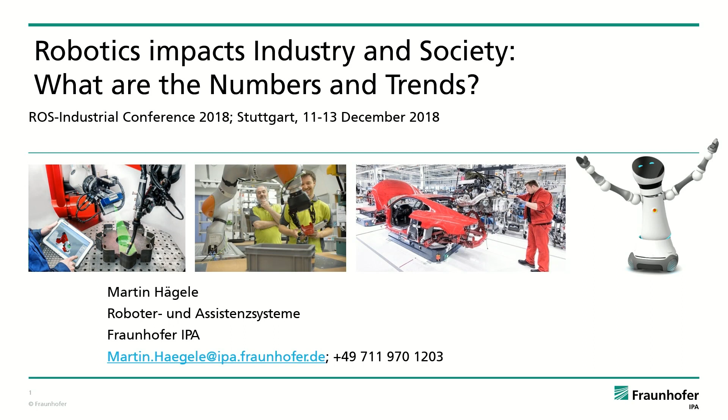Before I come to the figures, I'd like to give a short introduction to what we are doing at Fraunhofer IPA, who we are, and what we are working on. My presentation: Robotics Impacts Industry and Society - what are the numbers and what are the trends?

The Fraunhofer Society - many of you have probably heard of it or had interactions with us. We are the largest organization of applied research in Europe. Applied research means that whatever resources, competencies, and infrastructure we maintain serves a purpose - to satisfy industrial R&D needs.

We are distributed all over Germany, in total 72 institutes, and each institute stands for a typical portfolio of activities. In our case, it's manufacturing, engineering, and automation, so we clearly address the production area and the suppliers of manufacturing equipment.

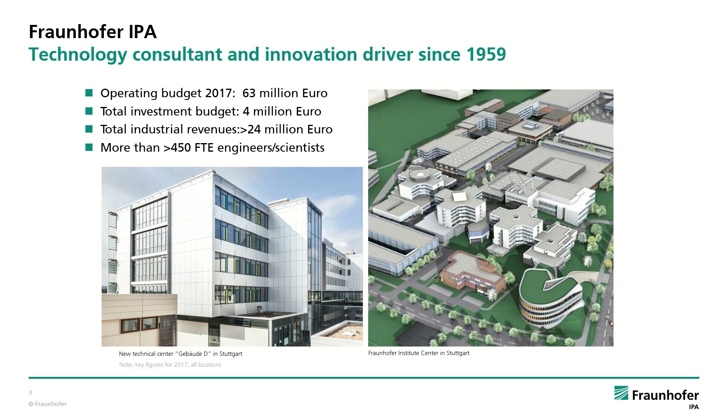We will see the facilities tomorrow when we visit our institute. Here you see the buildings, and as you might anticipate, we maintain large infrastructure regarding labs and testing facilities - this is the signature of applied research.

In total we have about 450 engineers, and a good deal of our annual turnover comes from direct industrial contract research. Here you see some of the labs we maintain in Stuttgart - I've marked the ones we'll be visiting tomorrow with a red frame.

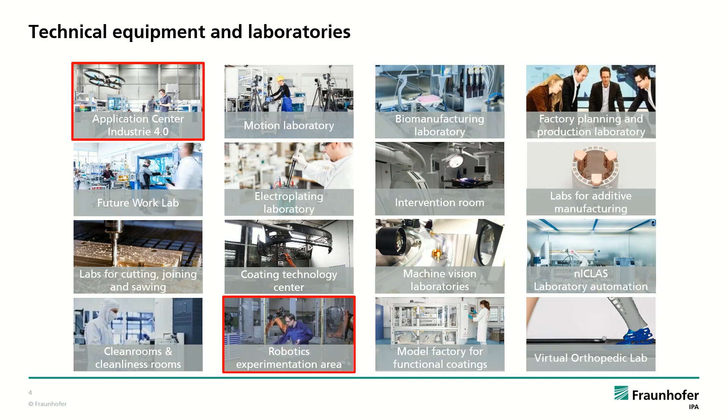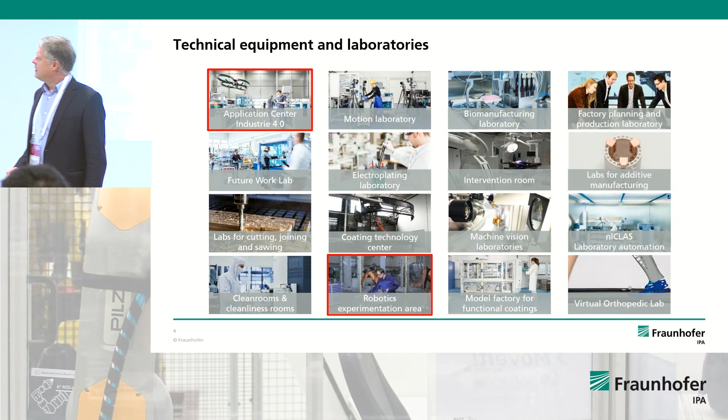We'll look into the robotics experimentation area and also the Industry 4.0 application center. As you can imagine, robotics, Industry 4.0, machine learning, and data science are currently very much in the focus of our activities. That's the last slide of our profile.

We also maintain a complete research factory called ARENA 2036. ARENA stands for Active Research Environment for the Next Generation of Automobiles, and 2036 marks the 150th anniversary of the invention of the car here in Stuttgart.

The ARENA is a focal point of the local industry, which is very much influenced by automotive industries, their suppliers, and suppliers of automation equipment and machine tools. This has a tremendous impact on our portfolio as Fraunhofer IPA, and many actors in these industries come together to form an ecosystem, a common platform called ARENA 2036.

One of the activities is the manufacturing challenges of the car of the future. We have here Thomas Dietz, one of my colleagues, who is the manager of the experimental production facility. Maybe you've seen a bit of the video - it represents the idea of future car manufacturing.

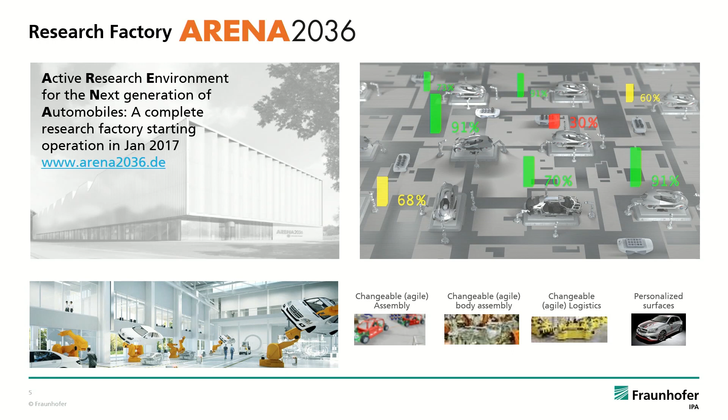So you no longer see conveyor belts - you rather see work cells connected by automated guided vehicles. These work cells are composed of robots or manual workplaces, with no fences. Quite a number of the typical trends we're currently seeing happening everywhere are focused here in this research factory.

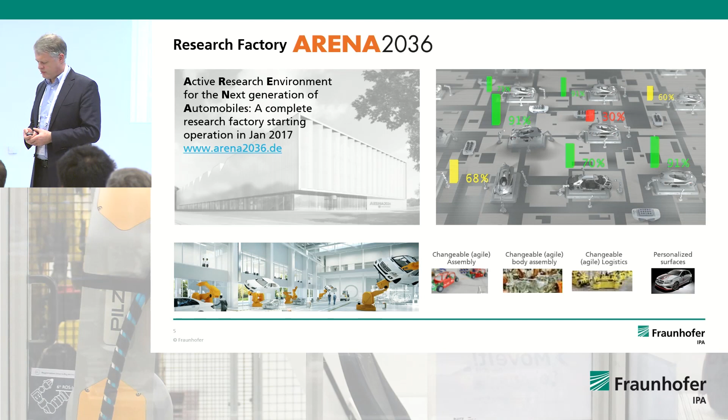Now jumping into the numbers - one of my part-time activities is to serve at the International Federation of Robotics, the IFR, which is the platform of international robot manufacturers. One of the main purposes of the IFR is to provide statistical material and trends on where robotics is going.

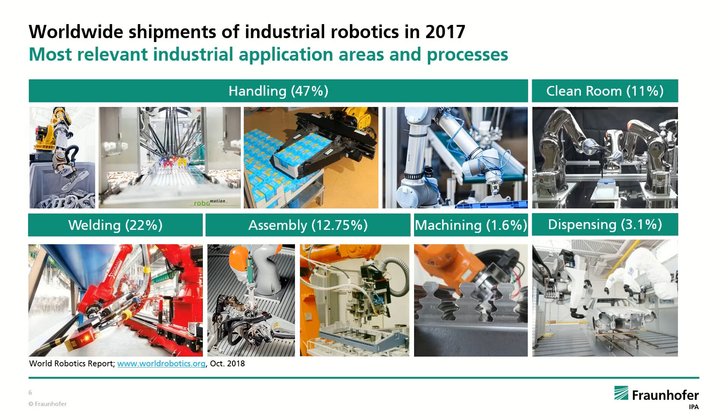So when we talk about installation numbers or recent shipments, we see extreme strong growth worldwide, and there's a reason to this. In 2017, close to 400,000 robots were installed worldwide, and there's a very strong gradient upwards. You see the reason is especially due to the high demand in China, shipments are very much increasing.

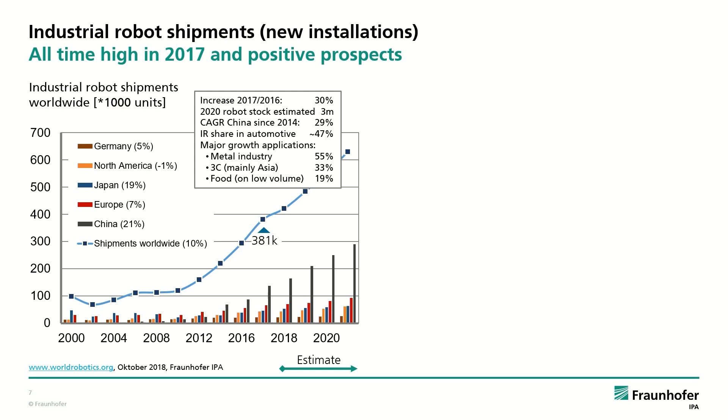So here you see the indications in percentage. In 2020 we expect close to 3 million robots, and still about half of all robot installations go into the automotive field. However, this used to be 54% some years ago, so you see there's actually a decline in the installation numbers of robots in the automotive area. What more and more comes into play is the 3C domain, which is communication, computers, and consumer. This is related to all the applications - handling, assembly, gluing, dispensing material for precision goods, from mobile phones to tablets and so forth.

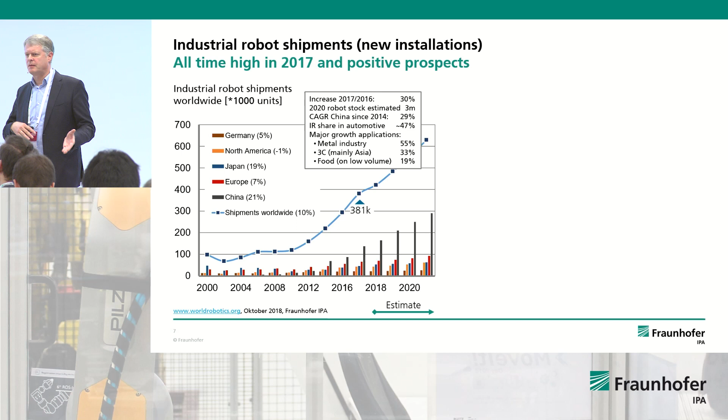Of course, it's now not very fair to compare, for instance, shipment numbers in China to Belgium, to take your example, because obviously the economies are quite different in size. So there's a different measure we use, and that's the so-called robot density. The robot density expresses how many robots are installed in a given area, divided by 10,000 workers in that area. It's a typical normalization of that figure.

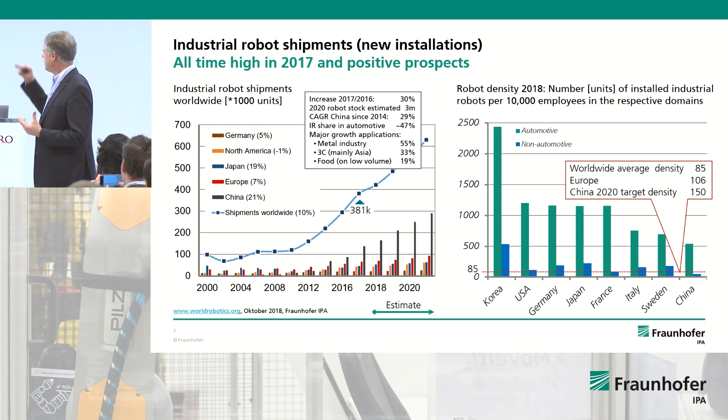There we see that, of course, since there's huge growth in China, China is still represented under average. Furthermore, you see in this picture, regardless of where you produce automobiles today worldwide, it's very highly automated, and probably all on the same automation level, maybe with the exception of Korea, which indicates a little bit higher numbers. This robot density in the automotive field is about a factor of 5 to 6 higher than in all other industries.

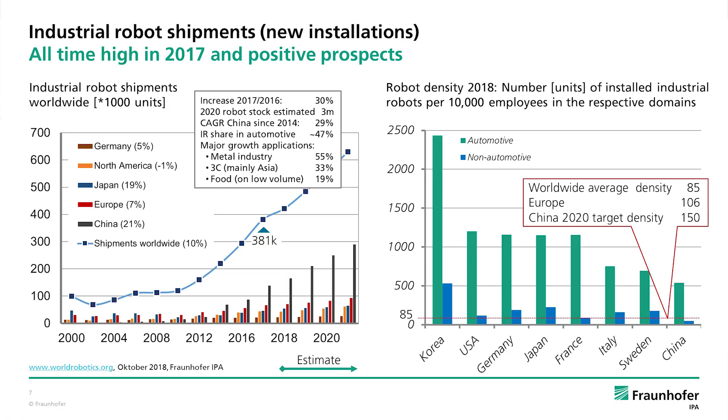What are the technological trends? There's one interesting trend, and this trend is cost effectiveness. With the increasing numbers, we experience also economies of scale. This means that robot unit prices are decreasing.

If you take the average price of all robots, regardless of their size, large or small, you end up at an average unit price of about 40,000 US dollars. At the same time, you see that price level has been decreasing over the years, while there's also an increase in salary or wages. From that chart, you could deduce that never before has automation been as cost effective as today. However, we all know that the robot unit price is almost only a part of the entire cost of installation. As a rule of thumb, it's about a factor of 1/4 or 1/5 - usually the system is about 4 to 5 times more expensive than the robot itself.

We have seen more trends, for instance, human-robot collaboration. We don't have official numbers on that area yet, mainly due to the big confusion we are experiencing in this field. If we really talk about human-robot collaboration, meaning robot and human working at the same time on the same workpiece in possible direct contact, there are only a couple thousand, maybe even just a little more than 1,000 installations worldwide. Most of these installations are pilots or prototypes, etc.

However, if we look at robots which are also named or called collaborative robot installations without fences, where you have some kind of coexistence, then the number is quite higher - significantly higher than the 1,000 or couple thousand I just indicated.

Sensors: about 15 to 20%, depending on the application area, of all robots are equipped with sensors. That's not very much. However, all robot manufacturers actually try to increase the sensor level of their robots, up to the idea that all robots will be equipped with sensors.

For instance, when we talk about force torque sensors, this means joint level control or torque control or force torque control, we see more and more robots which have sensors of these kinds integrated in the equipment. The same holds, of course, for vision-based sensors, so that we expect that in the very near future, 100% of all robots might come with sensors.

And once we have sensors on board, we also use them to detect objects, to identify objects, to model work environments, and also to actually recognize the worker. So obviously there's a tremendous potential in endowing robots with intelligence, with cognitive skills.

Another aspect which goes hand in hand with human-robot collaboration is intuitive use. Nobody wants to have an expert programmer working with a robot. So the requirement is to enable the worker to work with a robot as intuitively as the worker would work with any other tool or machinery.

So obviously, intuitive human-robot instruction is on the roadmap of the robot manufacturers. In fact, there are quite a couple of companies producing or offering already interfaces which enable graphical programming, programming by voice, or other capabilities.

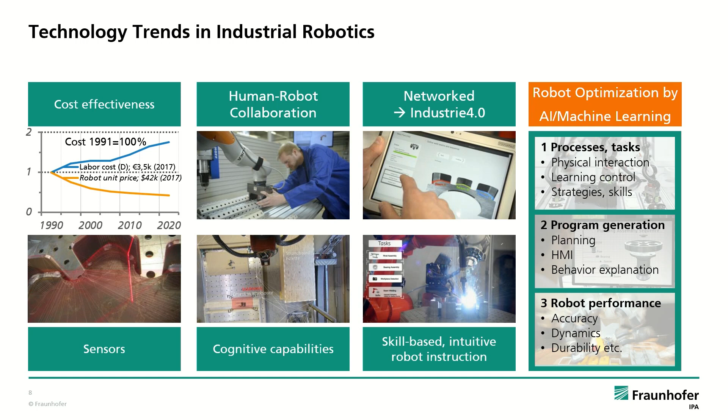One aspect which is increasingly coming onto the map of current research is machine learning, using AI in robotics. We already can localize three main areas where AI and machine learning are used in robotics. The first is related to the actual processes: to detect objects, to optimize processes, to improve strategies.

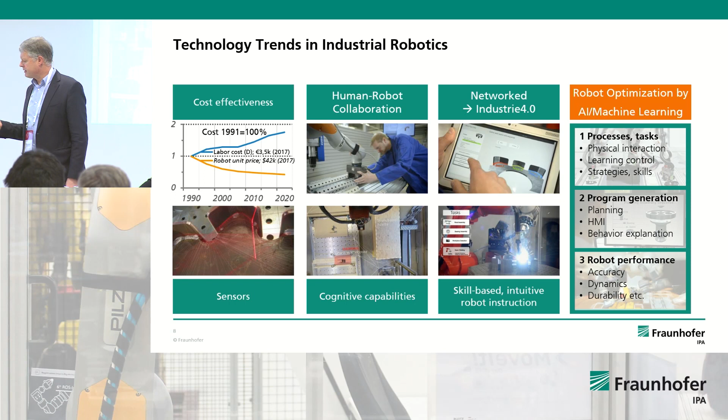The second is, of course, program generation: how is a program actually generated out of digital data? And the third case is to improve robot performance. This is quite interesting, especially for less expensive robots, maybe equipped with lower grade mechanics or mechatronics, so that we can improve dynamics, accuracy, and durability of the robot through machine learning. These are the trends most research labs worldwide have on their research agendas.

Another big trend is that we see a lot of robot functionalities outside the manufacturing scenario, and robots used outside the manufacturing area are called service robots. Service robots come in two categories: the first is robots for professional use, which is equipment that is part of a service or part of professional task execution. The other branch is service robots for personal or domestic use.

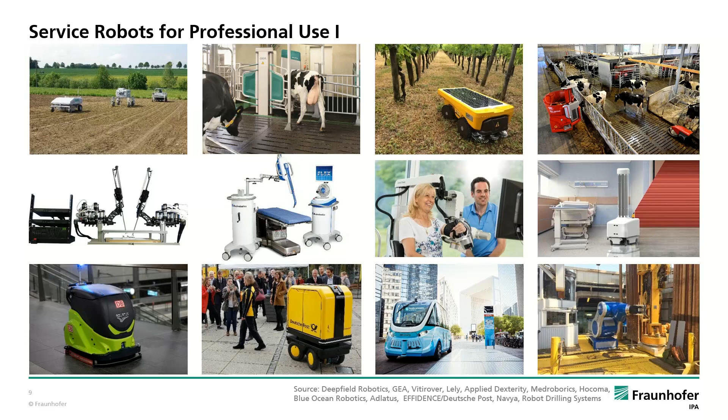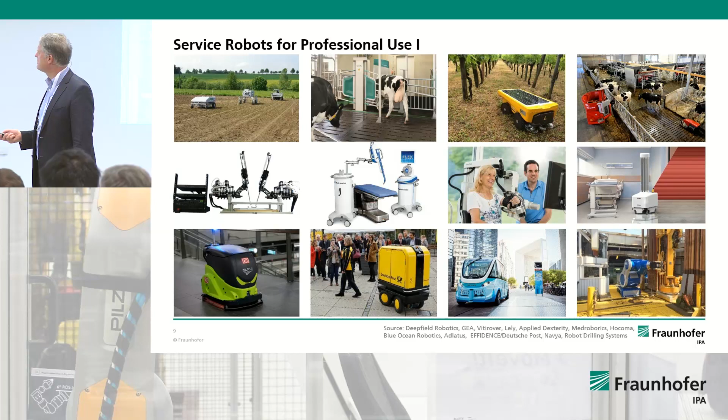So I have here some examples of service robots for professional use, for instance in agriculture, in the medical field, in cleaning, in transportation, and inspection maintenance, rehabilitation, transportation, defense, underwater, retail, entertainment. So there are a tremendous number of different application areas of service robots.

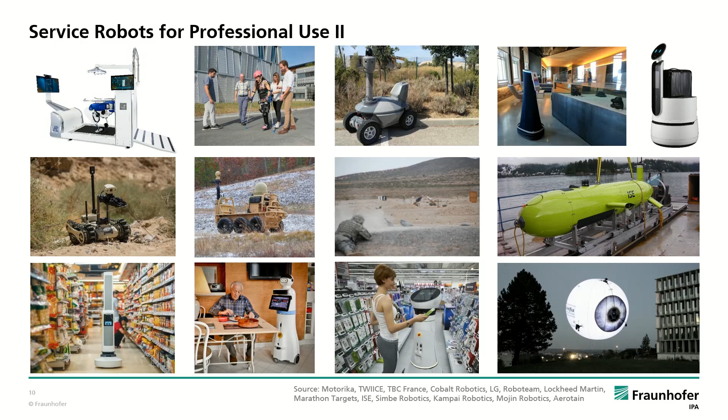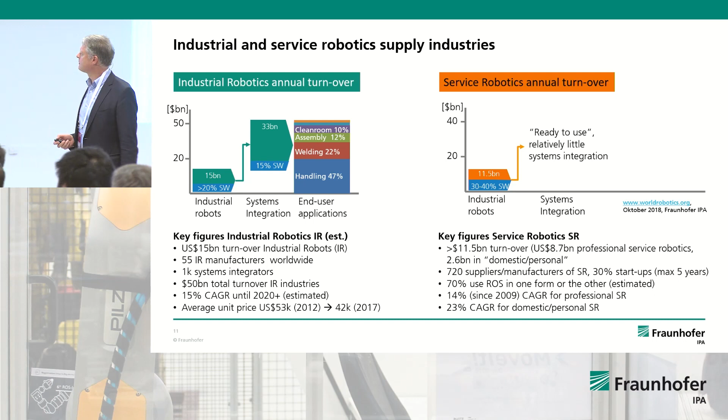The IFR names a worldwide market of industrial robot applications of about 50 to 55 billion US dollars—that's the world market. We have relatively few industrial robot manufacturers, about 55, maybe 60, but certainly below 100. So it's a relatively small number of industrial robot manufacturers. We have way more system integrators. I already talked about the annual growth rate and the average unit price.

So the picture in service robotics is quite different. First of all, the market is still a little bit smaller. In total, we have about below 20 billion euro turnover at the moment.

However, it's very strongly growing. You see the annual growth rates of 14 and 23% for professional and domestic personal service robots.

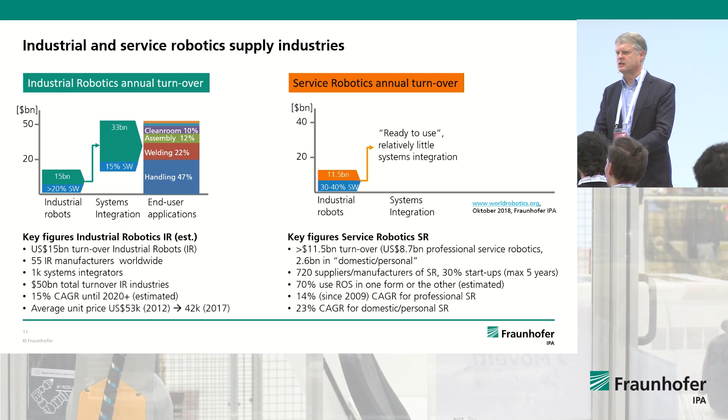We have 720 suppliers of service robots. So it's a completely different, a way more fragmented market of quite many very small companies. However, there are also larger companies underway. We'll see that difference in a minute.

And also striking is that we estimate that more than 70% of these companies use ROS in one form or the other.

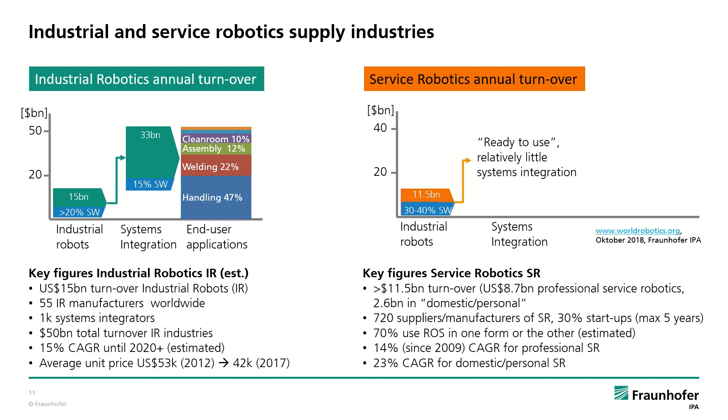Maybe a couple of remarks on the service robotics market, because it seems to be fragmented and a little bit more complicated. How is statistics actually generated for that market?

The IFR reaches out to more than 700 service robot manufacturers, asks for numbers. How many robots were shipped last year? This means in 2017, how many, or what value was shipped, what is the forecast for the next 4 years, both in units and in value. And then we also ask for other data, like what is the company size, age, status, and where that company is located.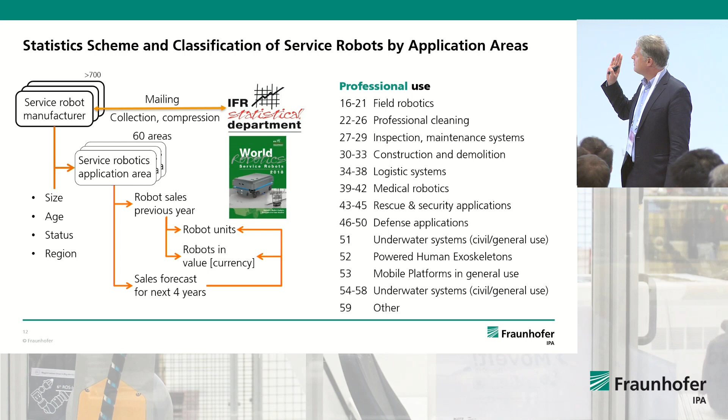You can retrieve quite a big deal of these figures from databases, and we see that there are quite many different application areas, and in total there are about 60, starting with field robotics, and within that category there's also different types of robots, for instance milking robots, or for the barn, or for broadacre, for harvesting, and so forth, so that there are quite many types of robots, professional cleaning, and so forth.

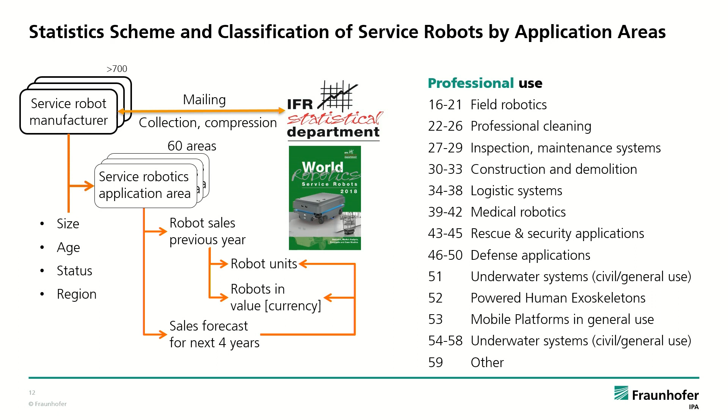You have seen some of the examples, and on the next slide we see the main application areas and the growth rates, and we see pronounced growth in logistics, in the medical domain, in field robotics, which means agriculture, and of course defense. And don't be mistaken for the blue bar.

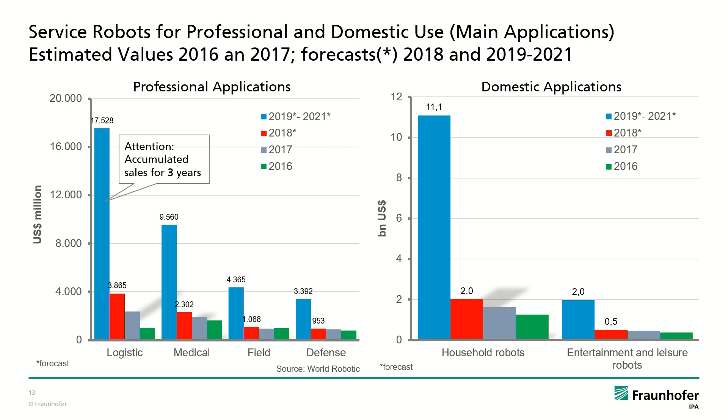The blue bar actually comprises numbers in terms of sales for the next 3 years. Maybe one remark is that these are all conservative estimates, because only those numbers which are reported make it into the statistics. So, for instance, we have very good feedback from companies producing agricultural robots, and we have a way worse feedback from companies in the defense area, for obvious reasons. Since we only use data which are reported or existing, the actual numbers might be still higher.

For the household and private domestic domain, numbers are also quite interesting. We have two main categories. These are household robots, mostly vacuum cleaners, window washers, and lawn mowers. And the second category is entertainment and leisure robots, robots which cost a couple of hundred euros. So that's the situation at the moment.

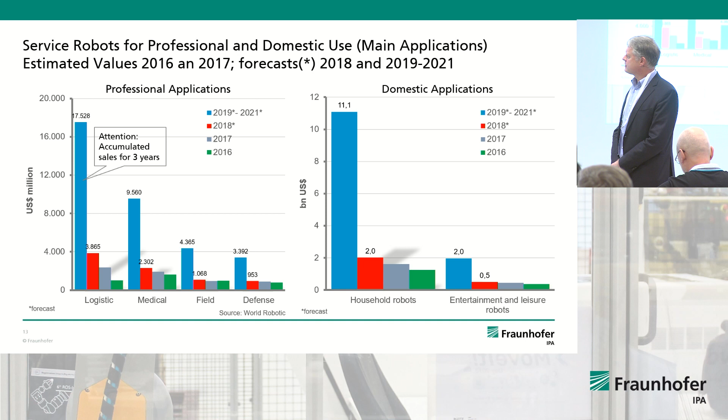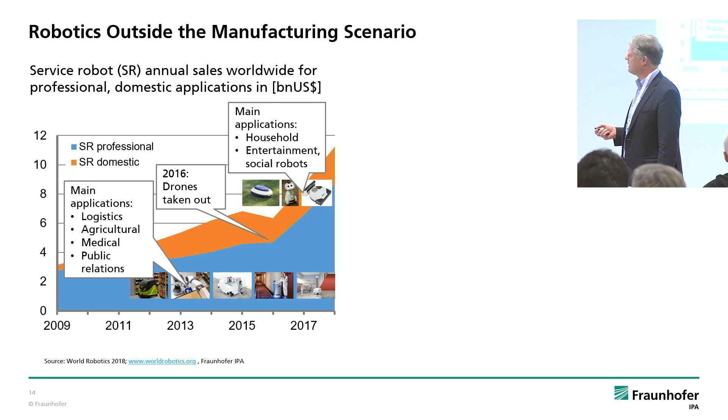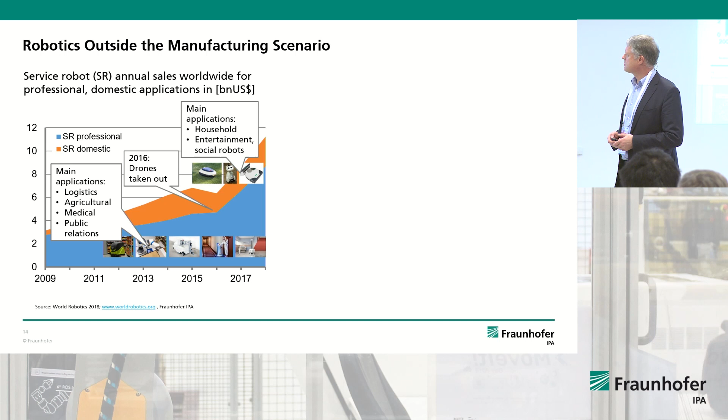When we sum it up, we talk about a market of slightly more than $11 billion with the growth numbers which were indicated. One remark is also, in the past we counted drones as robots, but in 2016 we gave up on counting drones because there are quite too many, and the industry was also very fragmented, very difficult to reach, and obviously there's now our own statistics on robot drones.

Interesting is, when we talk about 720 companies worldwide offering service robots of any kind, where are these companies located? What is the age of these companies? And here we see, for instance, that still most of the service robot companies are located in Europe.

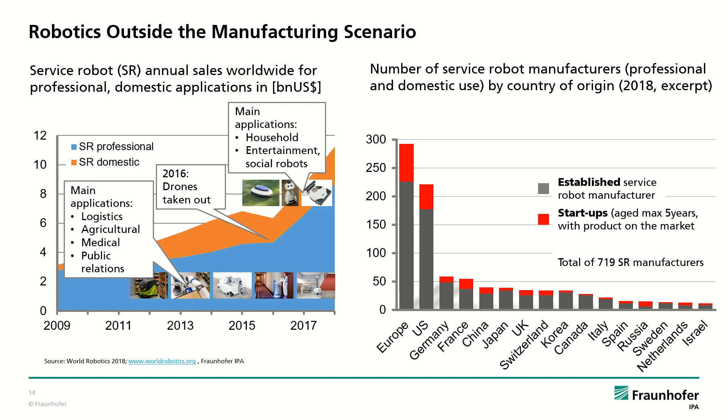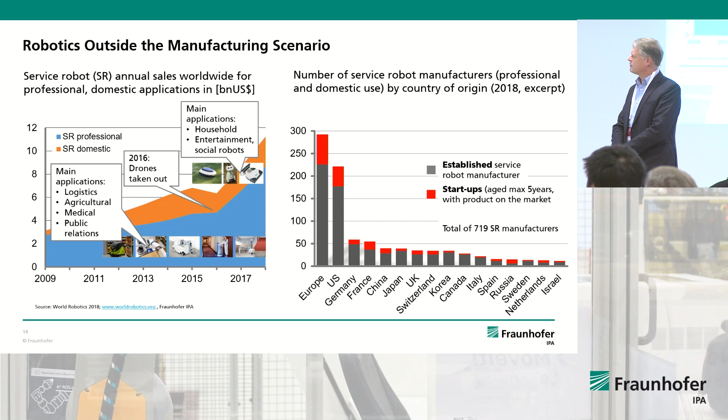You see about 30% of these are startups. We count startups as companies which have a product on the market and are less than 6 years old, so 5 years maximum - that's a startup in our case. Followed by the US, and you see quite many European countries. Again, the Europe bar is the sum of the European single bars added, so that's the situation as we see it at the moment.

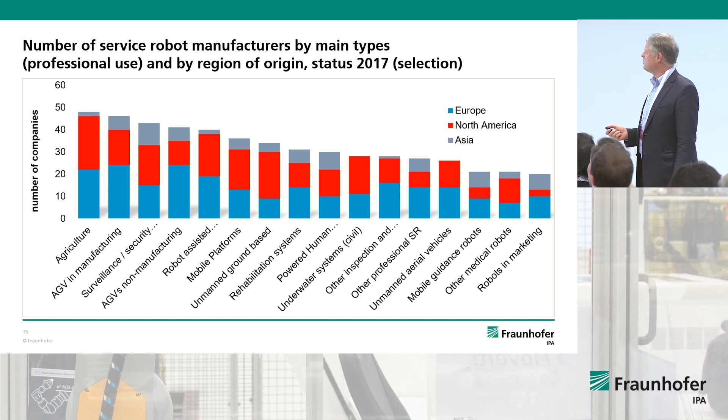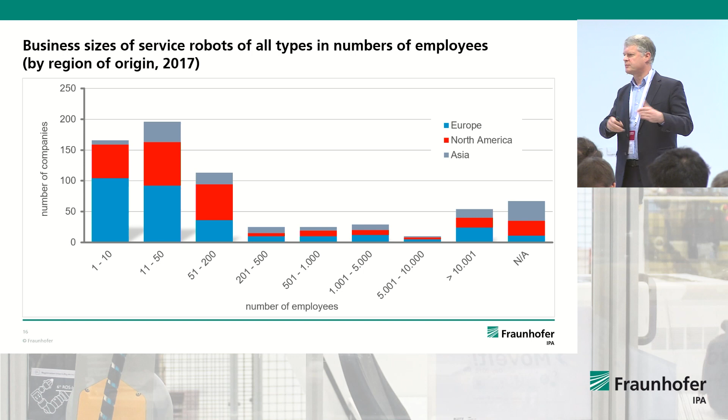And last, on the other scale, we have very large companies like Siemens, like LG, like other multinational corporations which have robotics research, which have robotics products already in their portfolio.

So that's it for now as a short overview on technology, on statistics, on markets, and I'm of course very happy to answer your questions. Thank you.

We are at a ROS conference. Can you give some outlook on usage of ROS in industrial robots?

Uses of ROS in industrial robotics? Is somebody looking at it? How often is it used? Is it for production or for research only? And what's the estimate of it?

So we do not have figures. Maybe there are estimates among people deeply involved in the ROS Foundation, or ask maybe Mirko from the memberships. We do not have that for industrial robotics, but for service robotics...